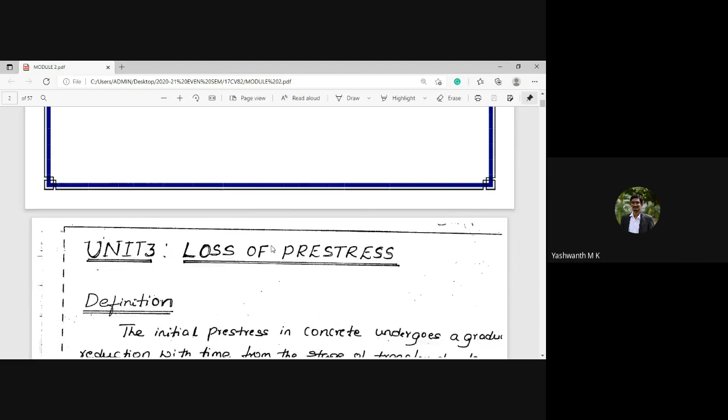First, let me define what is loss of pre-stress. The initial pre-stress in concrete undergoes a gradual reduction with time from the stage of transfer due to various causes, which is termed as loss of pre-stress. The keywords here are initial pre-stress, stage of transfer, and due to various causes it will undergo reduction.

Now I will define this in a very simple way. We know from module number 1 the concept of how to induce pre-stressing. Through the cable, we apply a compressive force on either end. We induce a pre-stressing force of certain magnitude through the cable, which may be parabolic or whatever profile. Whatever pre-stress we induce is called the stage of transfer. I hope we have solved problems on this condition.

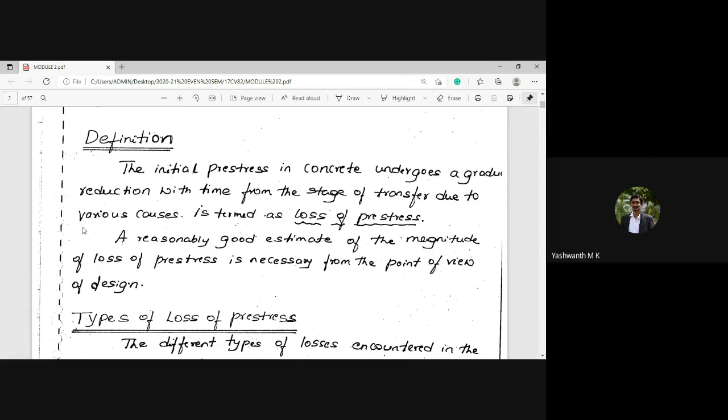So very simply, whatever pre-stress was induced in the initial stage, that is during the transfer stage, will undergo reduction as time elapses. That loss is called loss of pre-stress. Moving on, I've highlighted that whatever initial pre-stress induced during the stage of transfer will undergo reduction due to various causes. So what are those various causes? That is the next topic.

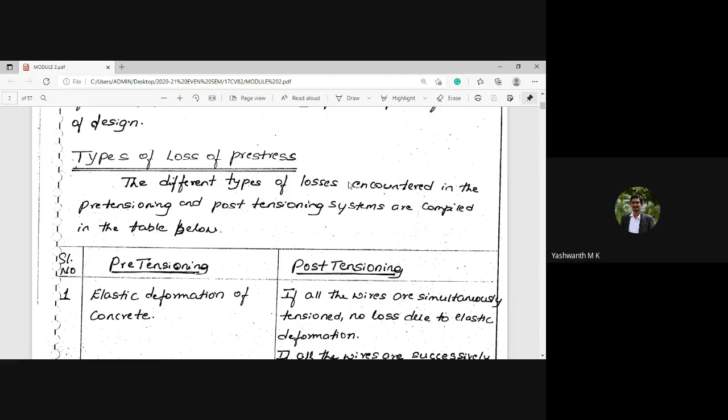The types of loss of pre-stress. Because of these causes, whatever pre-stress is induced initially or during the stage of transfer will undergo loss. Let me tell you the different types of losses encountered in pre-tensioning and post-tensioning systems, compiled in the table below. The important thing to know is that losses depend upon the system of pre-stressing.

The losses will happen in PSC beams depending upon the system. In the pre-tensioning system, you will come across certain losses, and in the post-tensioning system, you will come across certain other losses, because in both systems the types of losses will differ, due to the material and material compatibility.

As I stated, in pre-tensioning the concept of tensioning is different, and in post-tensioning the concept of tensioning is different. So based on this tensioning concept, the pre-tensioning system losses and post-tensioning system losses will differ. Let me see what those losses are.

Coming to the first loss in the pre-tensioning system, the first loss that will reduce the pre-stressing force is elastic deformation of concrete. Two materials come into picture that cause this reduction in initial pre-stress: concrete and steel. Because of these two materials, whatever initial pre-stress I induce through the cable will undergo gradual reduction as time elapses.

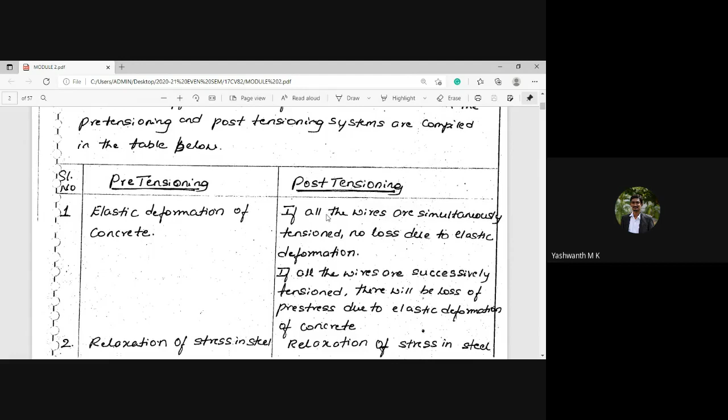Next, if the same wires - 3 number, 4 number, or any number of wires - are successively tensioned, that means tensioned one by one, then the losses that occur, this elastic deformation loss, will occur in the pre-stressed concrete beam. This is very important, you need to note down: if all the wires are tensioned together, no loss due to elastic deformation in post-tensioning. If those wires are tensioned one by one, then there will be loss of pre-stress due to elastic deformation of concrete.

Next is relaxation of stress in steel - the same thing that was there in pre-tensioning happens here also. Next, shrinkage of concrete, same thing. Creep of concrete, same thing.

Apart from these four losses as mentioned in pre-tensioning, two more losses occur in the case of post-tension beams or post-tensioning systems: friction loss, and another one is anchorage slip. Friction loss and anchorage slip - friction between the concrete and steel, and the slip of the wedges that have been put in the steel to tension.

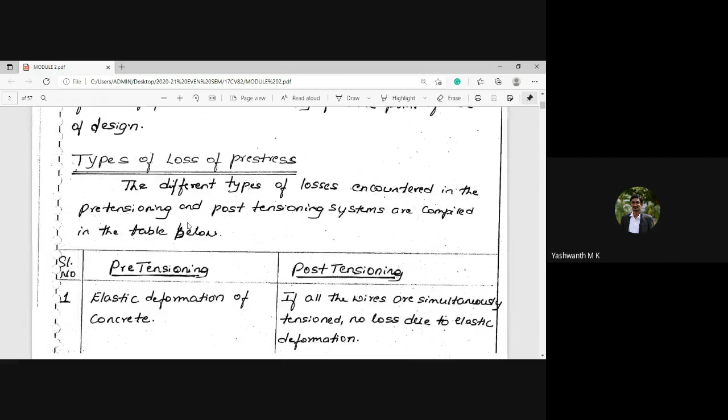From the examination point of view, this is very important. List the various types of losses. At that instance, write down in this particular way, compile these in a table and write down specifically so that full marks can be awarded to you. Now I have listed them.

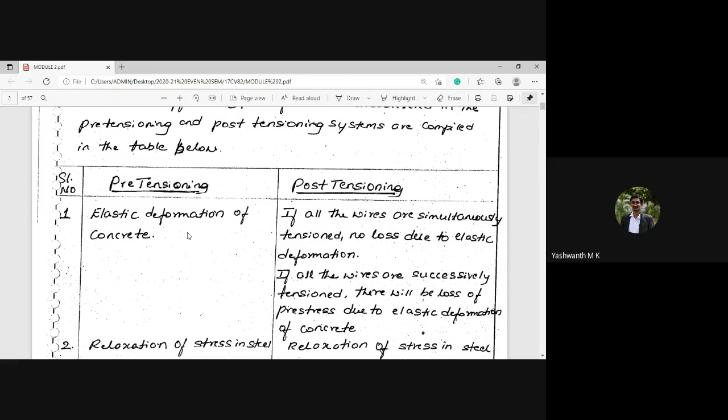So let us discuss in detail how all these losses happen in the pre-stressed concrete beam. Let me move on.

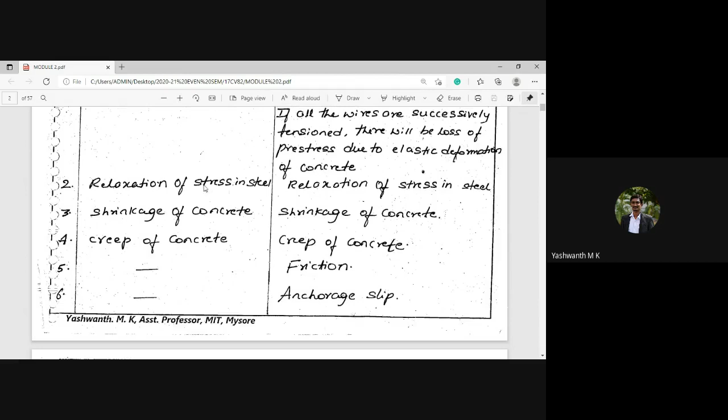The first loss, as stated, I'm going to consider the losses together. I'm not going to discuss pre-tension and post-tension separately because all four losses will be same in both, with slight difference in the elastic deformation. Regarding relaxation, shrinkage, creep, all those things are same.

So I'm going to discuss one by one. As we know from the table, the first loss is loss of pre-stress due to elastic deformation. Do you know the meaning of elastic deformation? It means once the cable that has been put inside the concrete beam is tensioned.

Later on I'm going to pour the concrete, and later on allow it to cure or get hydrated. This process you already know from the basics of the concept of pre-stressing.

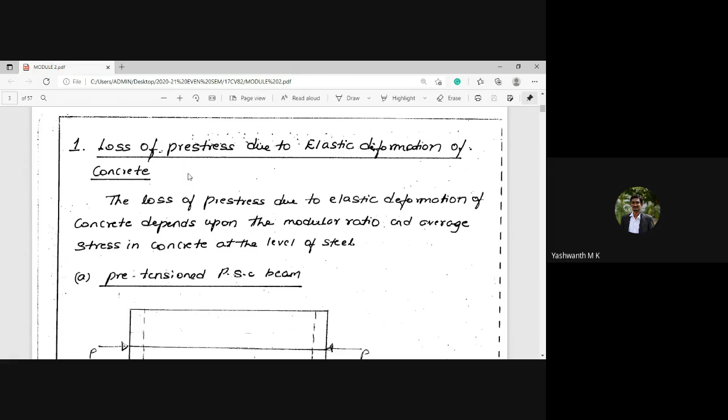After this, you can see from the diagram the concrete will undergo certain deformation as the time elapses. Whatever deformation happens will be within the elastic range.

Let me explain the reason for this deformation. Once the concrete beam has been subjected to pre-stressing force and external load - we know from module 1 the PSC beam is subjected to pre-stressing force and external load - the concrete will undergo certain deformation within the elastic range as the time elapses.

After a certain time, this concrete will undergo change - you can see here this solid line indicates the initial length. Once the concrete undergoes some elastic deformation, you can see the length has been reduced, and this deformation is within the elastic range.

Please note down, this is very important - that's why it is called elastic deformation. When concrete is subjected to external load, it is stressed, and when concrete undergoes stress, it will undergo certain deformation - that is, change in length, which you measure as strain. Whatever strain happens due to the effect of stress will be within the elastic range, that's why it is called elastic deformation of concrete.

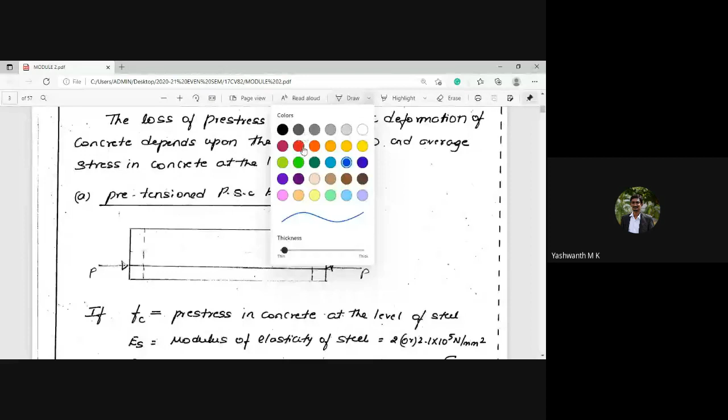The one more factor that will depend is average stress in concrete at the level of steel. So what will be the stress in concrete at the level of steel? Depending upon these two factors, one is modular ratio and another one is the stress in concrete at the level of steel, the loss of pre-stress due to elastic deformation of concrete is going to vary.

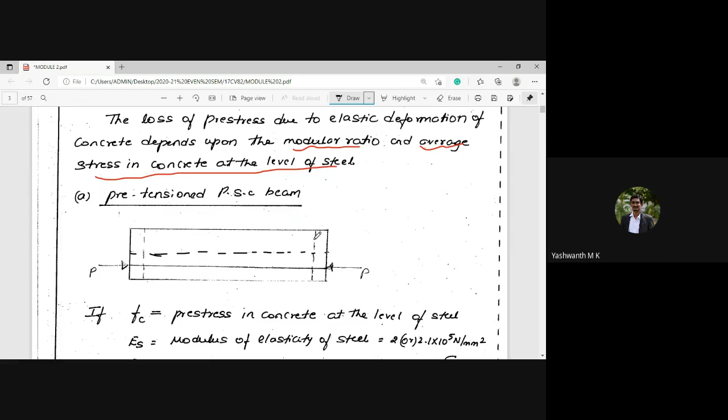Let me explain with the diagram. This will be the central axis, and this will be the PSC beam. You can see the straight cable has been induced with certain eccentricity, and has been induced the pre-stressing force of magnitude P.

Now you can see FC is the pre-stress developed inside the concrete, that is compressive stress. FC indicates compressive stress developed in the concrete at the level of steel. Why? Because I need to create a pure compression inside the PSC beam in order to counteract the tensile stresses, as already analyzed in module number 1. So here it will create a FC.

Next, ES is the modulus of elasticity of steel. We know from the basics that is 2.1 into 10 to the power of 5 Newton per millimeter square will be the modulus of elasticity of steel.

Next, EC, modulus of elasticity of concrete, which is equal to 5700 root FCK. This modulus of elasticity of concrete can be determined in two ways. This is the theoretical modulus of elasticity we can find once you know the compressive strength of a concrete or the mix, we can calculate the modulus of elasticity.

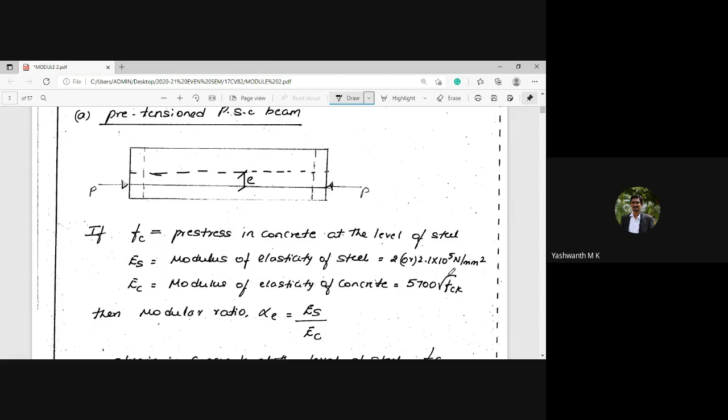The other way, the accurate or exact way we can determine is the experimental method. We need to apply the load on the concrete beam, and within the elastic range, draw the stress strain curve. Based upon the stress strain curve, draw the tangent, and based upon the secant modulus, draw the slope and calculate the stress and strain, substitute in the modulus of elasticity formula, that is EC equal to stress by strain, to calculate the modulus of elasticity of concrete.

So now, as I stated, the modular ratio is equal to ES by EC, which is very much required in the case of elastic deformation of concrete.

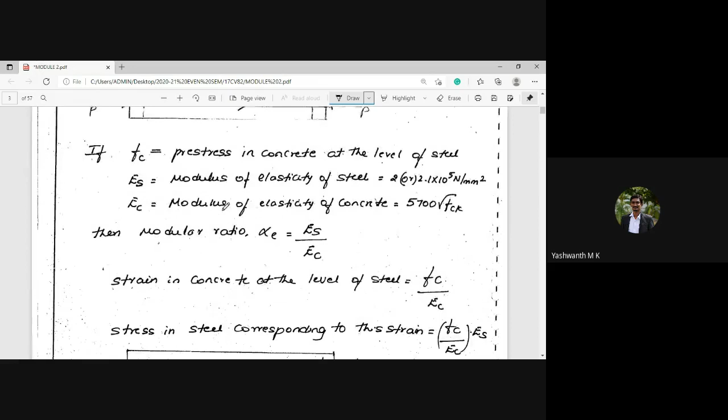Next, if you know what is the stress in concrete at the level of steel, and if you want strain in the concrete at the same level of steel, then the stress in concrete at the level of steel divided by modulus of elasticity of concrete will get you the strain in concrete at the level of the steel.

Next, the stress in steel corresponding to the strain is given by Fc by Ec into Es. So this factor multiplied by the modulus of elasticity of steel will get you stress in steel.

Therefore, loss of pre-stress equal to, what is the value of this? Es by Ec, so this Es by Ec is nothing but alpha E. Substitute that, alpha E and Fc will be retained same. So therefore, loss of pre-stress is equal to alpha E into Fc, where Fc is the stress in concrete at the level of steel, which is purely compression, given in Newton per millimeter square.

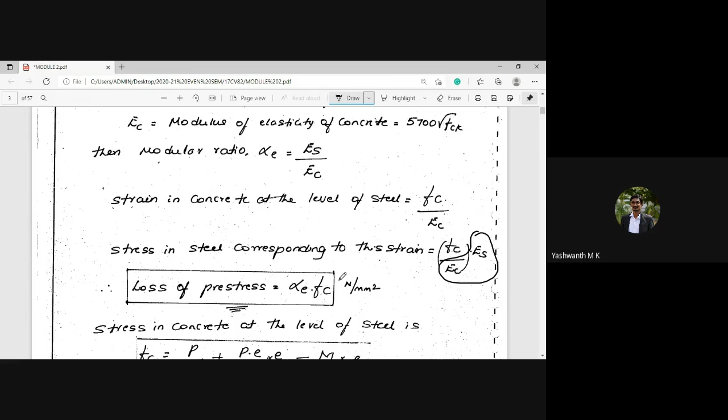Next, how to quantify or calculate this Fc? We know how to calculate alpha E, now how to calculate the Fc. This is the formula we are going to use to calculate the stress in concrete at the level of steel, that is Fc, which is given by P by A plus PE by I into eccentricity minus M by I into eccentricity. There is a small change in the formula - PE by I into E minus, that means what will be this bending stress at the level of this.

What will be the stresses due to dead load and live load at the level of steel? Based on this formula, I'm going to calculate the stress in concrete at the level of steel. Once you know Fc value and alpha E, that is Es by Ec, substitute in the main formula and calculate the loss of pre-stress due to elastic deformation in the concrete for the pre-tensioned case.

Next, let me go with post-tension, because here the two systems will differ. If a number of cables are pulled simultaneously, there will be no losses, so the loss of pre-stress becomes zero. This happens when all the cables are pulled together in the case of post-tension PSC beam. If the same number of cables are pulled one by one, then there will be loss of pre-stress.

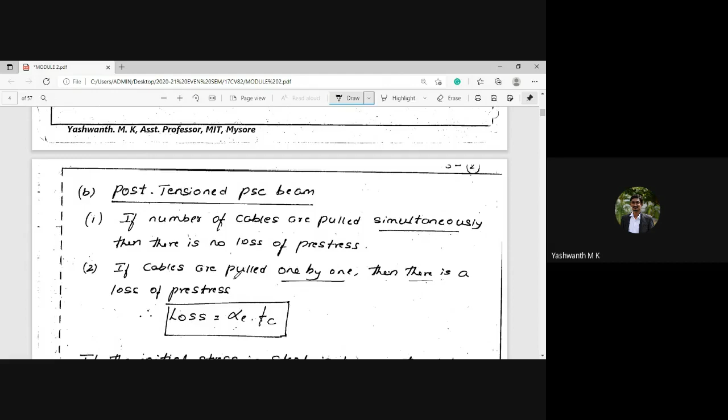That loss of pre-stress will be calculated by the same formula, that is loss of pre-stress equals alpha E multiplied by Fc. So like this, we need to calculate the loss of pre-stress due to the elastic deformation of concrete.

If the initial stress in the steel is known, the percentage loss of stress in steel due to elastic deformation can be calculated. Whatever stress has been induced inside the steel, if you know that, then you can easily calculate what percentage loss has occurred inside the PSC beam due to this elastic deformation. Because if you know the initial pre-stress and the final pre-stress, based upon initial and final we can calculate the percentage of loss of pre-stress in the PSCB. I am going to teach you this while doing the problem.

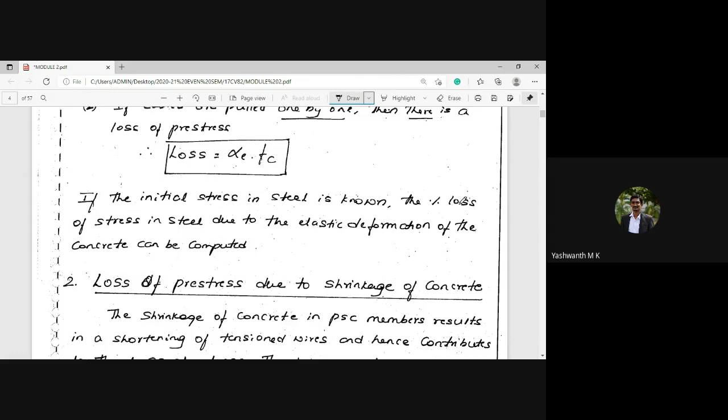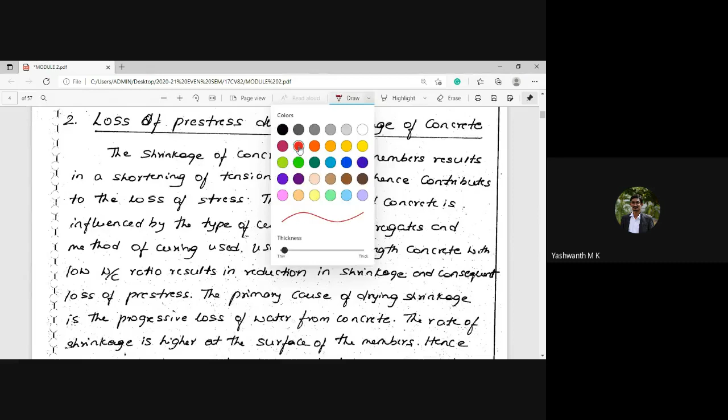Next, let me move on to the next losses that happen in the concrete, that is loss of pre-stress due to shrinkage of concrete.

You already know the meaning of shrinkage. Shrinkage is defined as the change in volume of concrete due to internal changes. As I stated, shrinkage depends upon various factors, that is cement, water cement ratio, aggregates, the type of aggregates, all those things. If these things vary, the shrinkage will vary, and if shrinkage varies, automatically the loss of pre-stress is going to happen.

The shrinkage of concrete in a PSC member results in shortening of the tension wire, and hence contributes to the loss of pre-stress. Whatever wires have been put in by tensioning inside the concrete beam will undergo deformation or change in length, or shortening in length, which will contribute to the loss of pre-stress.

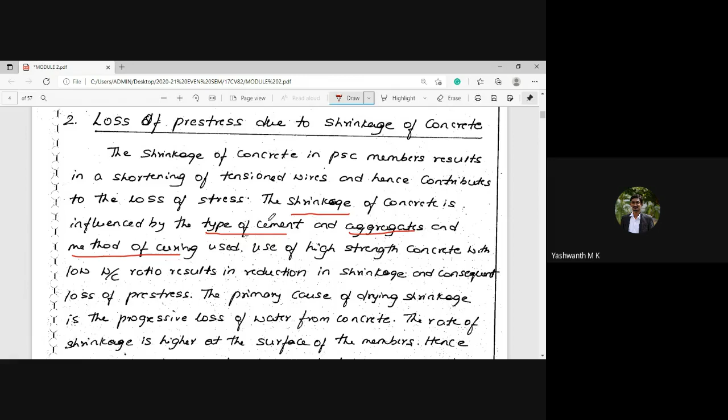The shrinkage of concrete will depend upon factors such as the type of cement, aggregates used, and method of curing. Based on these factors the shrinkage will vary. Use of high strength concrete with a low water cement ratio results in reduction in shrinkage and consequent loss.

As we know, in pre-stressed concrete members we preferably go with a special concrete called high strength concrete, which we attain with a low water cement ratio. A reduction in water cement ratio gets you high strength concrete, which in turn reduces the shrinkage, because no water or lesser water is available inside the concrete to undergo shrinkage, reducing consequent loss of pre-stress.

Next, the primary cause of drying shrinkage is the progressive loss of water. If more water is present inside the concrete, there will be enormous evaporation of water, as we know from the concrete basics. Whatever water is mixed in the concrete is going to evaporate as time elapses, and as the water evaporates from the concrete, it will undergo certain losses.

So those losses are called shrinkage. There are various types of shrinkage: drying shrinkage, plastic shrinkage, autogenous shrinkage, carbonation shrinkage, and so on. Based upon the constraints inside the concrete member, it will undergo particular types of losses.

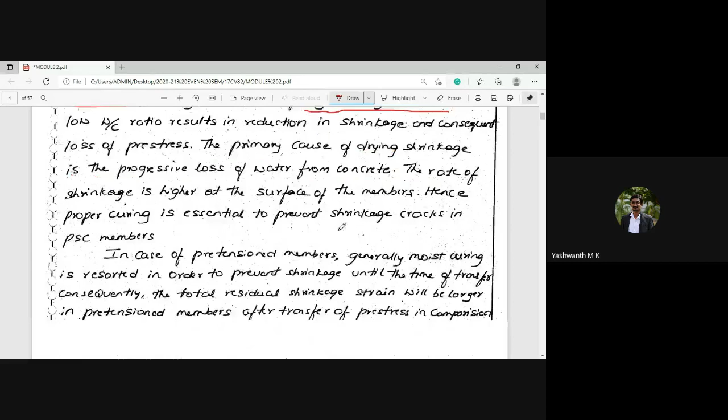The rate of shrinkage is higher at the surface of the member, hence proper curing is essential to prevent shrinkage cracks. So we need to be very cautious at that particular place, mainly at the surface. This can be avoided by proper curing, which can prevent shrinkage cracks in the PSC member.

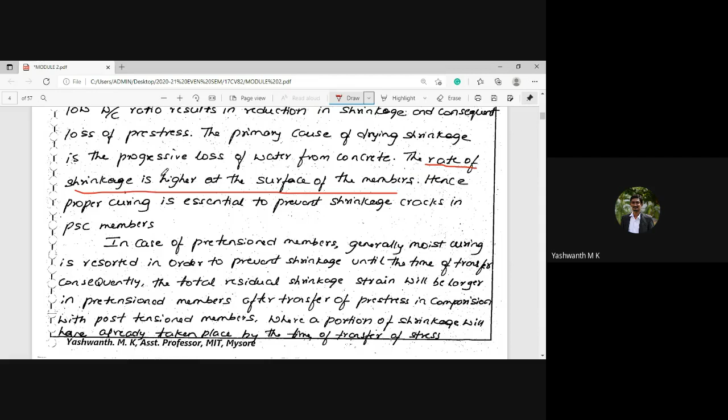In the case of pre-tensioned members, generally moist curing is resorted to in order to prevent shrinkage until the time of transfer. Please note down: in order to prevent the shrinkage, moist curing is resorted to until the time of transfer.

Consequently, the total residual shrinkage will be larger, meaning the left out shrinkage strain will be larger in the case of pre-tension members after the transfer of pre-stress, in comparison with post-tension members. So this shrinkage loss will be more in the case of pre-tension, where a portion of shrinkage will have already taken place by the time of transfer of stress.

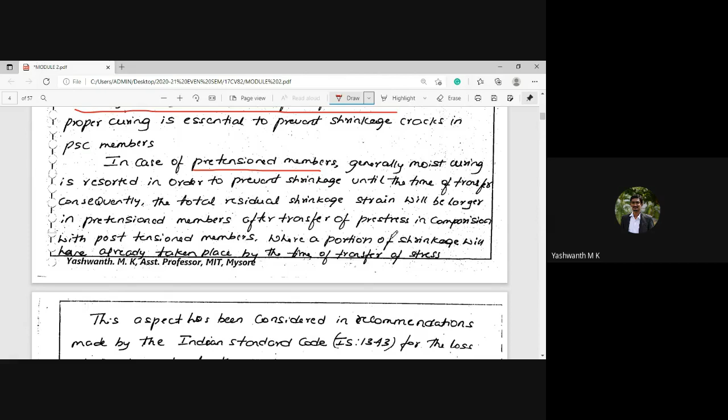That means some of the shrinkage happens during the time of transfer of pre-stress, and the remaining part of shrinkage happens after the transfer of pre-stress. That means during the transfer stage, the shrinkage will be initiated. So now I've explained the shrinkage.

Now how to quantify this? How to quantify the loss of pre-stress that happens due to shrinkage. For that, the Indian code has given certain recommendations. As per the recommendation made by the Indian Standard Code 1343:2012, or the earlier code 1980, this is the codal provision we are going to follow for analyzing and designing.

You can get some of the formulas in the 1343 codes. One is 1980, the earlier version; the present version is 2012, for the loss of pre-stress due to shrinkage of concrete.

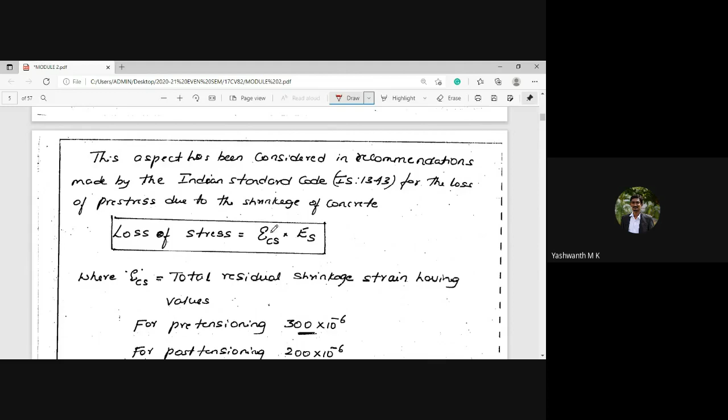The loss of stress is equal to epsilon Cs multiplied by Es. What is epsilon Cs? It is the total residual shrinkage strain having certain values: for pre-tension, equal to 300 multiplied by 10 to the power of minus 6. For post-tensioning, equal to 200 multiplied by 10 to the power of minus 6, divided by log to the base 10 of (T plus 2), where T is the age of concrete at transfer in days.

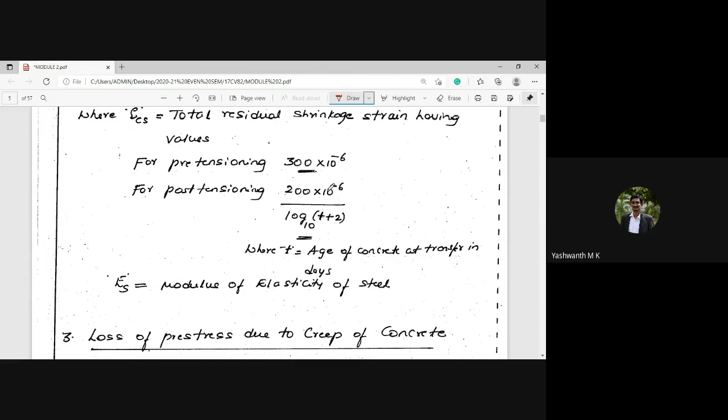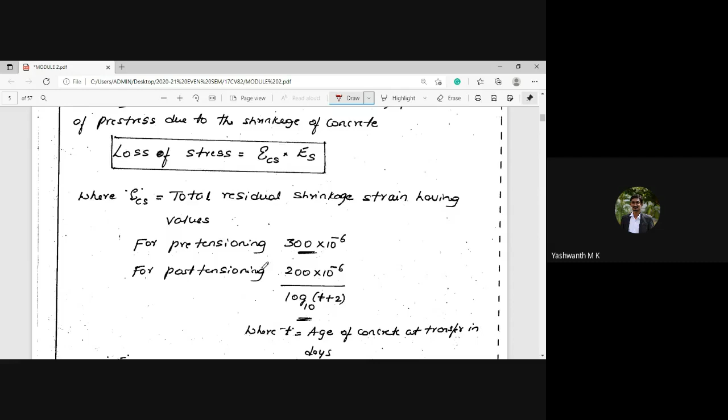So these are the two ways I can calculate the loss of pre-stress due to shrinkage of concrete. This epsilon Cs will vary based upon pre-tension and post-tension. Fine, next let me go with the next topic: loss of pre-stress due to creep.

Again, this loss happens in the concrete, so it is creep loss. Let me define what creep is: the sustained pre-stress in concrete of a pre-stressed member, meaning it is a time-dependent deformation. As time elapses, the concrete will undergo certain deformation due to external load variations or changes. That is called creep.

So the difference between shrinkage and creep is both undergo deformation. In the case of shrinkage, the deformation occurs due to internal variation. But in the case of creep, the deformation occurs due to external variations.

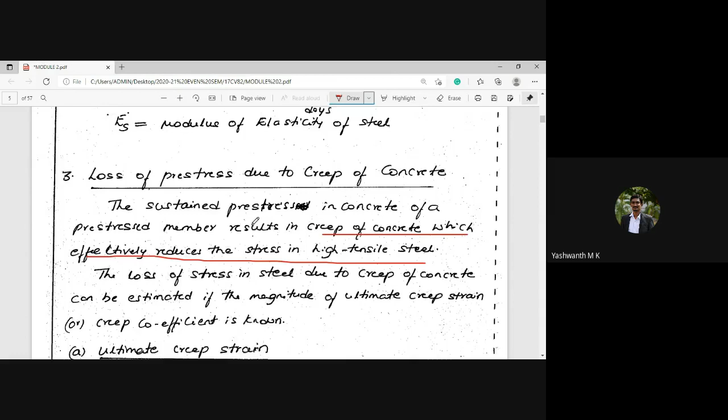The sustained pre-stress in concrete of a pre-stressed member results in creep of concrete, which effectively reduces the stress in high tensile steel. Whatever stress was initially there in the high tensile steel will undergo gradual reduction because of the creep of concrete effect. The loss of stress in steel due to creep of concrete can be estimated the same as shrinkage, if the magnitude of ultimate creep strain or creep coefficient is known.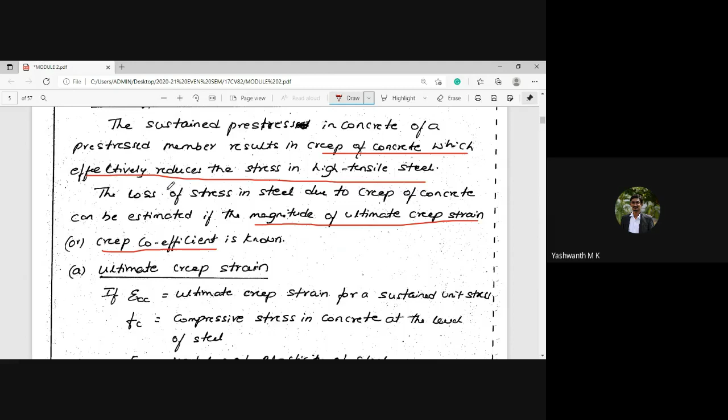So now very important, this loss of stress in steel due to creep of concrete can be estimated by two methods. One is magnitude of ultimate creep strain method, another one is creep coefficient method. Based on these two, I am going to estimate the loss of stress in steel due to creep. So first one is ultimate creep strain. Let me go with ultimate creep strain.

Let me consider epsilon Cc, which is ultimate creep strain for a sustained unit stress in a PSC beam. FC we know already, compressive stress in concrete at the level of steel in Newton per millimeter square. ES, modulus of elasticity of steel in Newton per millimeter square.

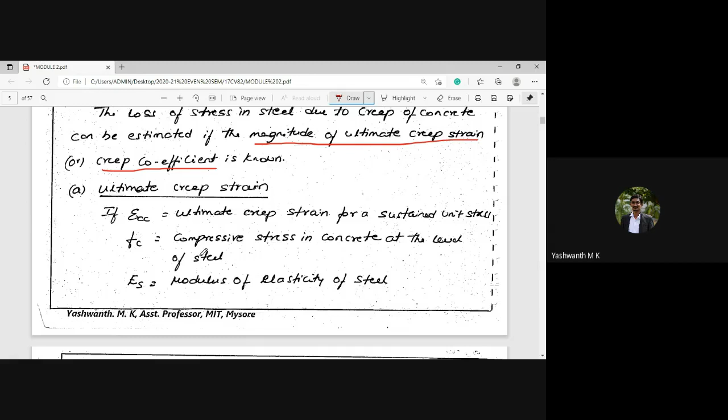So finally I will get you loss of stress in steel due to creep of concrete equal to epsilon cc, that is ultimate creep strain, multiply by stress in concrete at the level of steel fc, multiply by modulus of elasticity of steel. This product will get you the loss of stress in steel due to creep of concrete.

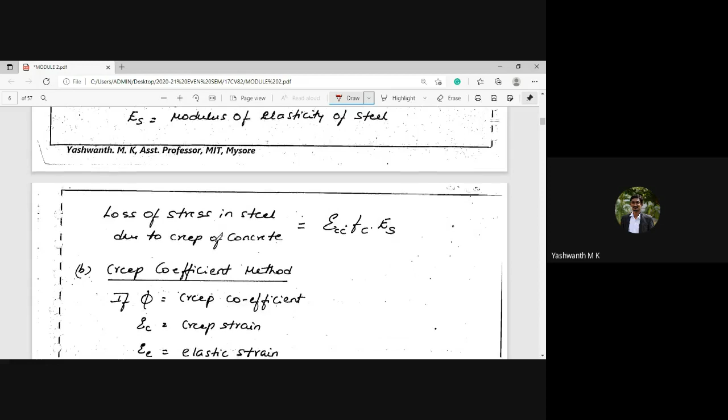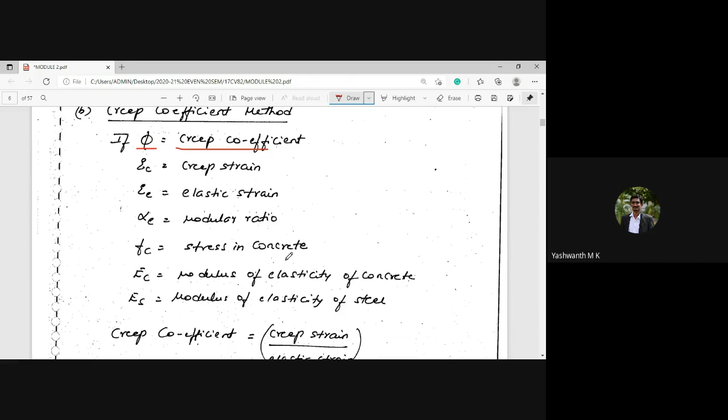Next method is creep coefficient method. This phi is called creep coefficient, epsilon c is called creep strain, and epsilon e is called elastic strain, and alpha e we already know, that is modular ratio, which is given by es by ec. fc we know, stress in concrete at the level of steel. ec and es you already know, it is modulus of elasticity of concrete and steel.

So this creep coefficient is equal to creep strain divided by elastic strain. I will repeat, creep strain divided by elastic strain will get you the phi value. So phi is equal to epsilon c by epsilon e. The creep coefficient phi is equal to creep strain epsilon c divided by elastic strain epsilon e.

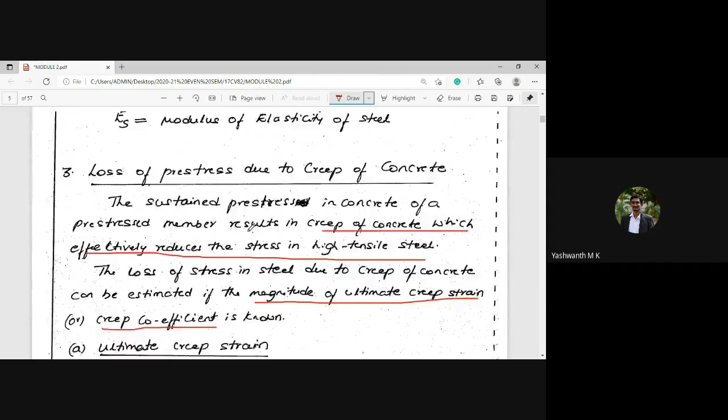So therefore, if you want to calculate the stress in steel, you can see the strain due to creep of concrete can be calculated by phi into epsilon e. That means I'm going to cross multiply this, so this epsilon e will go here. Therefore epsilon c is equal to phi into epsilon e.

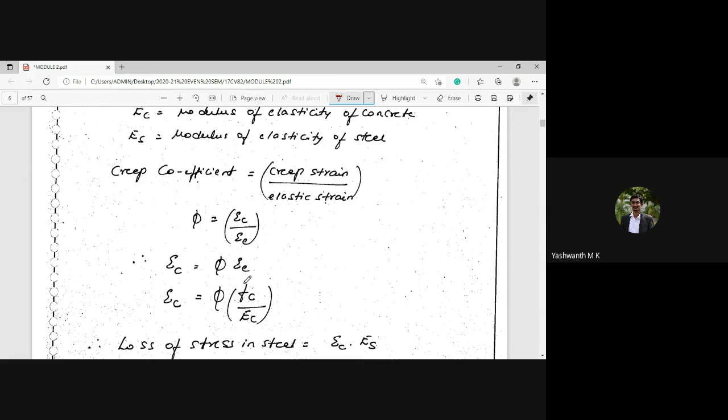So therefore epsilon c is equal to phi into, so what is epsilon e? Epsilon e, which is given by fc by ec. So that is elastic strain, which is equal to fc divided by ec. By this, we are going to calculate the strain in concrete.

Next, the loss of stress in steel is equal to epsilon c, that is strain in concrete, multiplied by the modulus of elasticity of steel. This will get you loss of stress in steel. So rearrange that. We know what is epsilon e, which is fc divided by ec.

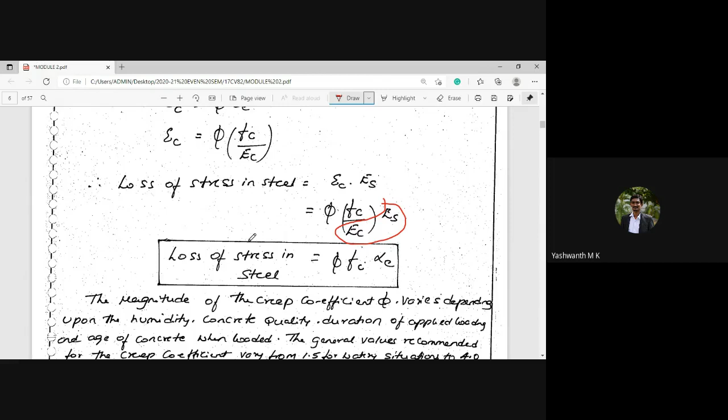Substitute that, multiply by es. Therefore, we know already what is the value of es by ec, which is alpha e, that is modular ratio. That is phi into fc into alpha e. So like this, we are going to calculate the loss of stress in steel due to creep of concrete. Is it clear?

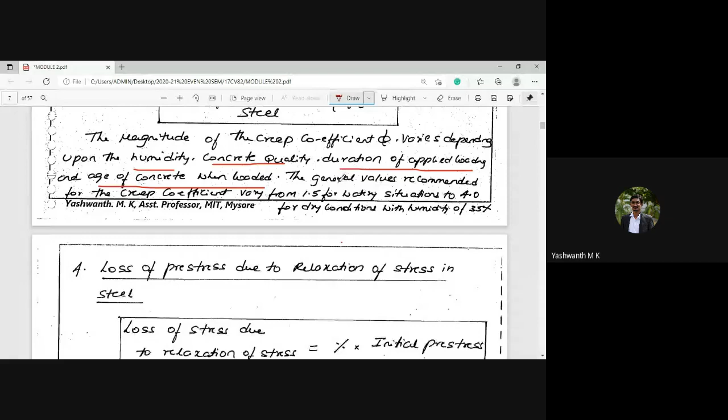So once again, the magnitude of the creep coefficient varies or depends upon humidity, concrete quality, duration of applied loading, and age of concrete when loaded. So at what particular age the concrete has been loaded, how many duration it has been loaded, what is the intensity it has been loaded, all those things will affect the creep coefficient factors.

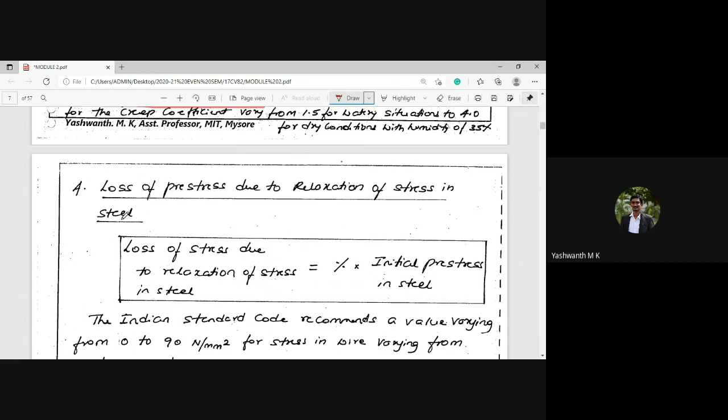Next, the next loss is loss of pre-stress due to relaxation of stress in steel. So this above three losses was there in the concrete. Now the losses that is going to encounter in the steel. So therefore loss of stress due to relaxation of stress in steel. That means the steel will undergo certain relaxation. So once it has been loaded, it will come back to its original position. So that is called relaxation.

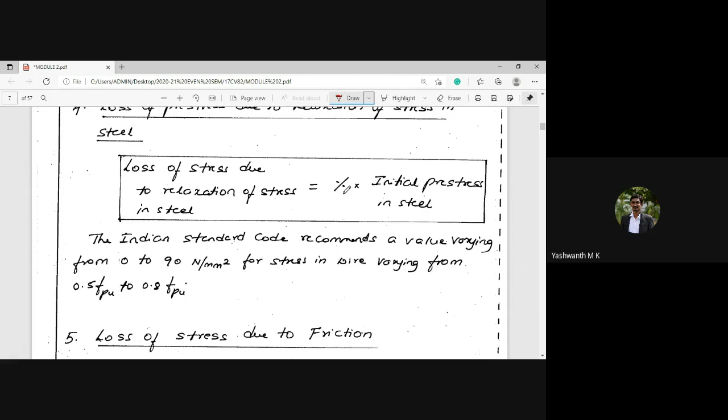So which will be given by percentage of relaxation that is going to happen multiply by initial pre-stress in the steel, which will get you the loss of stress due to relaxation in Newton per millimeter square. The Indian Standard Code recommends a value varying from 0 to 90 Newton per millimeter square for stress in wire, varying from 0.5 FPU to 0.8 FPU FPU means ultimate stress in pre-stressing steel. Is it clear? So this is the formula you are going to use to calculate the stresses due to relaxation of stress in steel.

Next, loss of pre-stress due to friction. So now observe here, till now we have discussed the losses for pre-tensioning system. Now, as I stated, two more losses are going to add: frictional loss and anchorage slip.

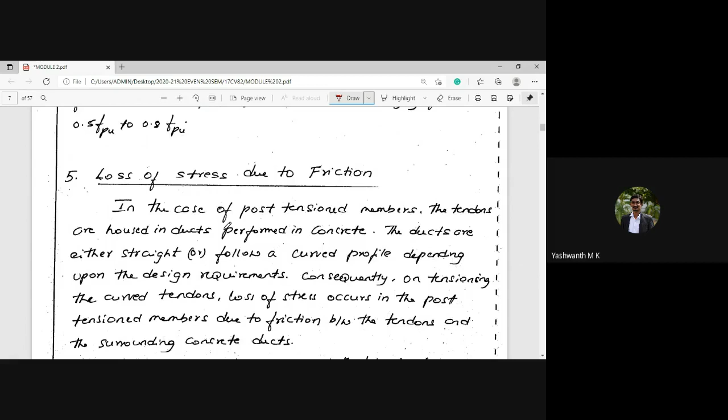In the case of post-tension members, the tendons are housed in ducts. These ducts are either straight or follow a curved profile depending upon the design requirement. For example, if you want a parabolic cable profile, you cannot go with a straight duct, you need a curved duct. So based upon the profile of the cable, you need to change the shape of the duct.

Consequently, on tensioning the curved tendons, loss of stress occurs in the post-tension member due to friction between the tendons and the surrounding concrete, to which the tendon gets bonded. Between these two materials, the friction will undergo some losses. So this is loss of pre-stress due to friction.

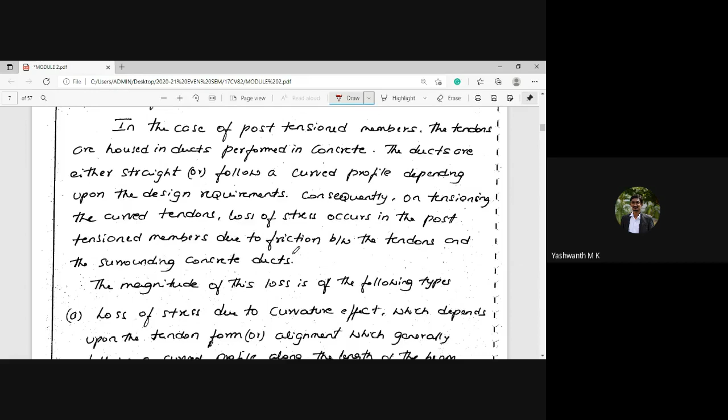The magnitude of this loss is of the following type. First, the loss of stress due to curvature effect, which depends upon the tendon form or alignment, which generally follows a curved profile along the length of the beam. This curvature effect mainly comes across in the case of curved profile cables.

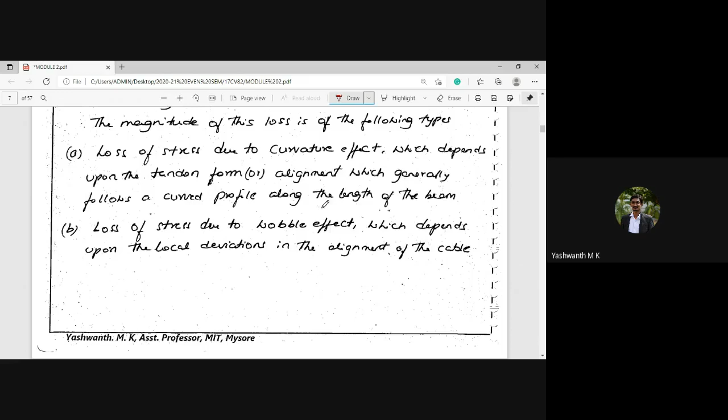Next, loss of stress due to wobble effect, which occurs because of wobbling of the cable. This depends upon the local deviation, that is, deviation of the cable placed from the alignment. If the cable deviates from the alignment, this deviation occurs because of the wobbling or wobble effect in the cable. So these are the two losses or effects that will come across, which in turn cause loss of stress in PSC members.

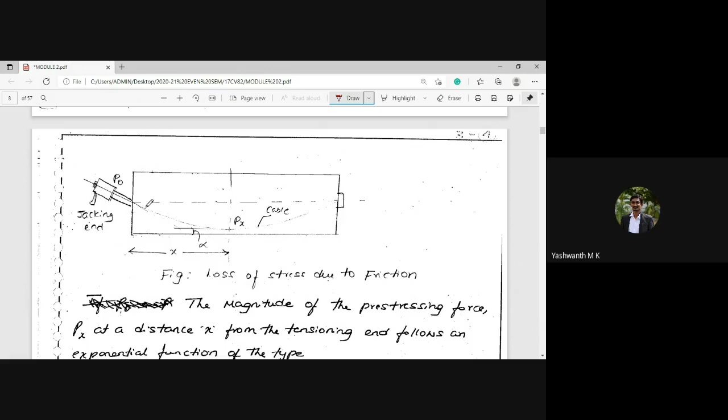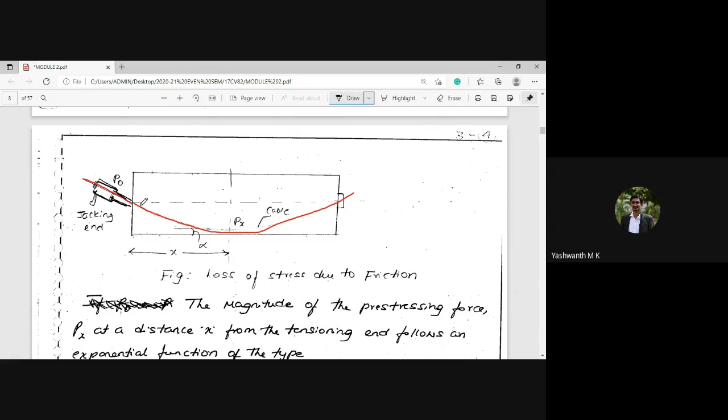Let me go through this. You can see here, this will be the central axis, and this will be the parabolic cable. Through this, I'm going to induce the jacking, so this will be the jacking end, where the cables will be jacked. Now this is the distance where the initial pre-stress magnitude will be induced. You can see here the magnitude of the pre-stressing force Px at a distance x from the tensioning end follows an exponential function of this type.

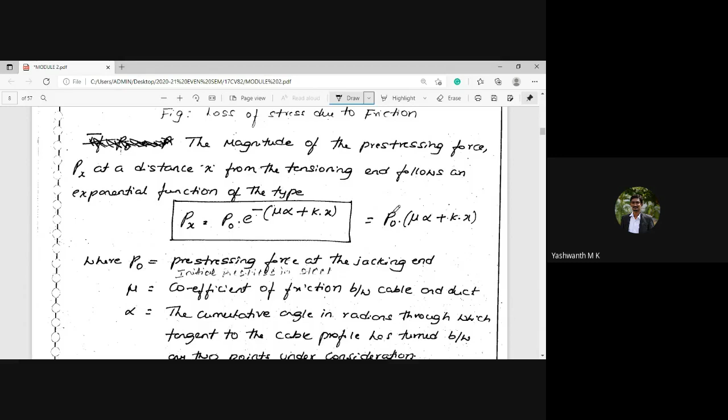That is, Px equals P naught multiplied by e to the power of minus (mu alpha plus kx). This is the formula we use to calculate the loss of pre-stress due to friction. Simplifying this, the loss of pre-stress in steel due to friction equals P naught into (mu alpha plus kx), considering the term small enough to simplify. Here P naught is the pre-stressing force at the jacking end, and P naught is the initial pre-stress in the steel. Alpha is the cumulative angle in radians through which the tangent to the cable profile has turned between any two points under consideration. You can see here, this will be the angle alpha.

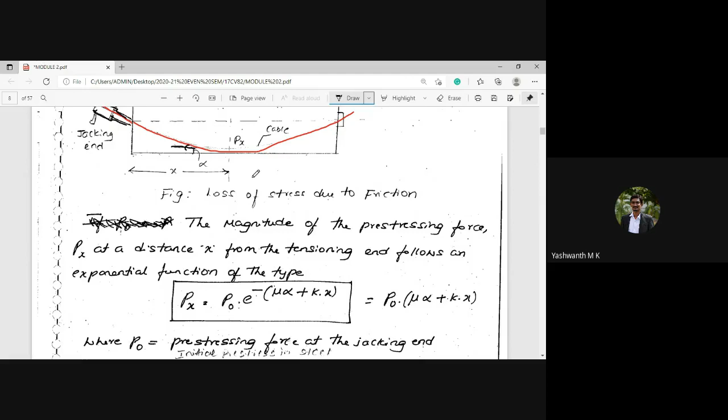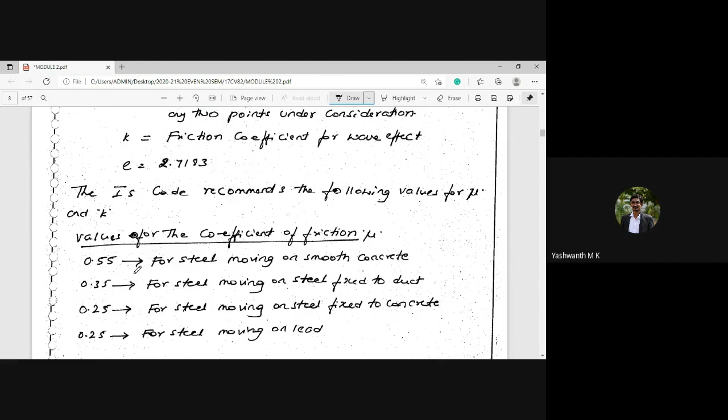Next, K, the frictional coefficient for wave effect. Alpha, you know what mu is, that is the coefficient of friction between cable and duct, and X is the distance where the pre-stressing force is applied. IS code recommends values for mu, coefficient of friction between cable and duct, depending upon the surface, whether it is smooth concrete, steel fixed to duct, or steel fixed to concrete. Based upon that, we can increase the coefficient of friction.

Once again, the coefficient for wave effect, that is K, is 0.15 per 100 meter for normal condition, and 1.5 per 100 meter for thin wall ducts and where vibrations are encountered. That means the wave effect will be more in the case of thin walls and vibrations. For normal conditions, the wave effect will be only 0.15.

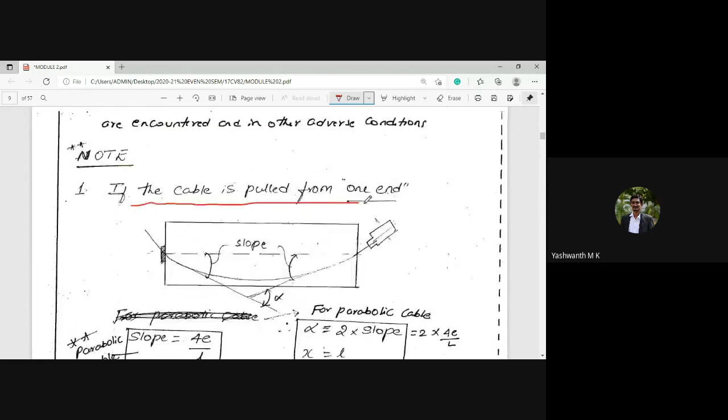This is a very important point that will come across while analyzing the problem or calculating the loss of pre-stress. Please note: if the cable is pulled from one end, that is jacking, then especially for a parabolic cable, the slope is given by 4e by L, where e is the eccentricity and L is the length of the beam.

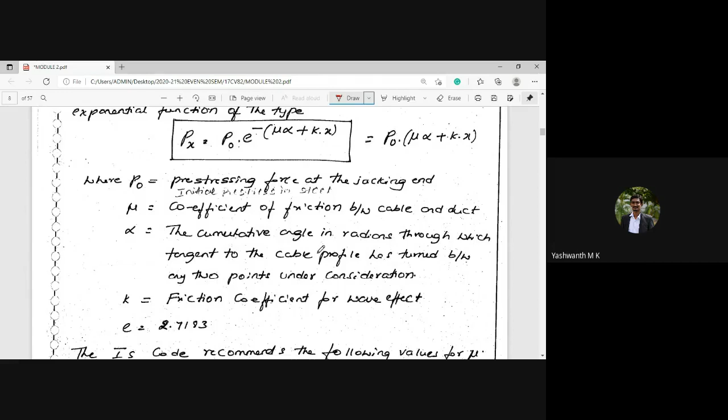For this case, if pulled from one end, for a parabolic cable, alpha, that is the slope, is equal to... we know what alpha is: the cumulative angle in radians through which the tangent to the cable profile has turned. I've drawn the tangent to this cable profile, and from where it meets the point of intersection from that end is called alpha.

This alpha is equal to twice the slope, that is 2 into 4e by L, for a parabolic cable, and x is equal to L for a parabolic cable. When you come across a linear cable instead of parabolic, with the same one-end jacking, the same formula applies, no change, 2 into slope, x is L, but there is a small change in the slope formula: for parabolic cable it is 4e by L, for linear cable it is 2e by L. This is a small change you need to observe, varying based upon the shape of the cable.

Next, the second condition: for the same pre-stressing force and same cable, if pulled from both ends instead of one end. In the earlier case I used a parabolic cable example, here I'll use a linear cable example. In both cases, once pulled from both ends, the slope formula is 2e by L. For one end, it is 4e by L, and for... okay, strike that off, that's not correct.

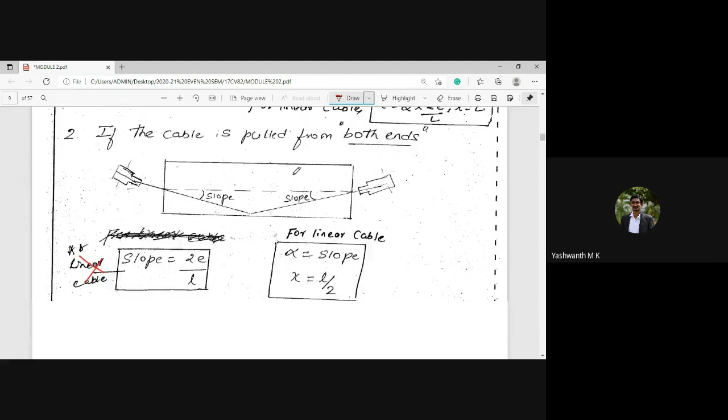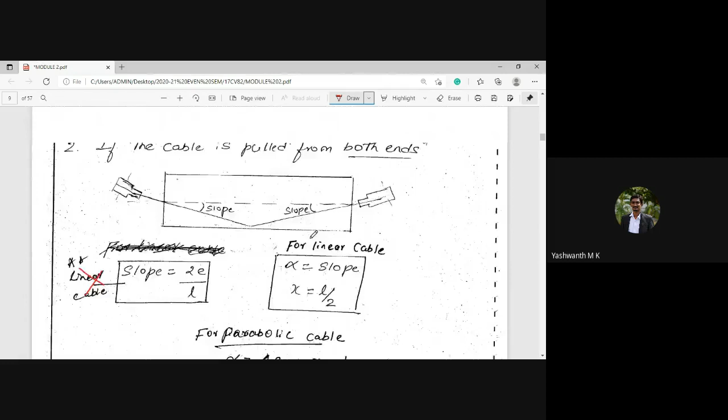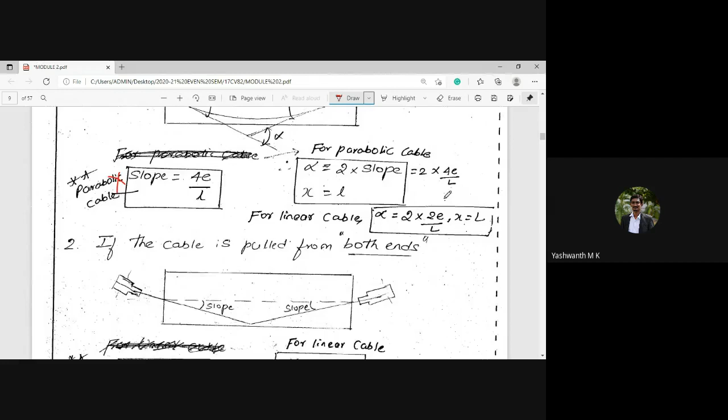For linear cable, alpha is equal to the slope, which is 2e by L, and x is equal to L by 2. For parabolic cable, alpha is equal to 4e by L... okay, for linear cable it is 2e by L, and for parabolic cable it is 4e by L, with x distance L by 2. In the previous case it was twice the slope, in this case it is just the slope. So this is the difference between a cable pulled from one end and both ends. And another difference is based upon the shape: if parabolic, it is twice, that is 4e by L; if linear cable, it is 2e by L. These are the two things that will differ.

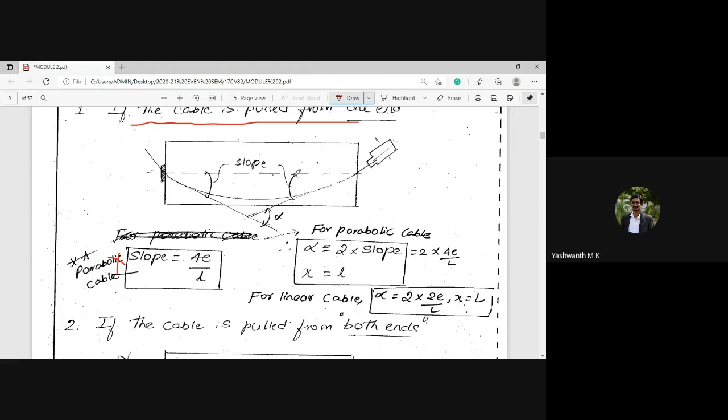You will come across this condition while calculating the loss of pre-stress in pre-stressed concrete beams. Hope you have understood.

Let me move further. The next loss is the loss of stress in steel due to anchorage slip. What is anchorage slip? This friction loss and anchorage slip loss, as I stated, will come across only in the post-tensioning system.

So now in most post-tensioning systems, when the cable is tensioned and the jack is released, please observe: to transfer the pre-stress to the concrete, the friction wedges—whatever wedges were showcased in module number 1, why were the wedges put? In order to induce the tensioning through the cable.

So those wedges will get loosened. Automatically, whatever wedges have been put will loosen, so those grips will be loosed, and the wedges will undergo certain slip. That slip will occur over a small distance, and this is called anchorage slip—whatever wedges have been anchored will undergo this loosening, called slip.

This slip will be very minute and small in magnitude, maybe in millimeters. The magnitude of slip depends upon two factors: the type of wedges, and the stress I am going to induce. Based on these two factors, the magnitude of slip will vary.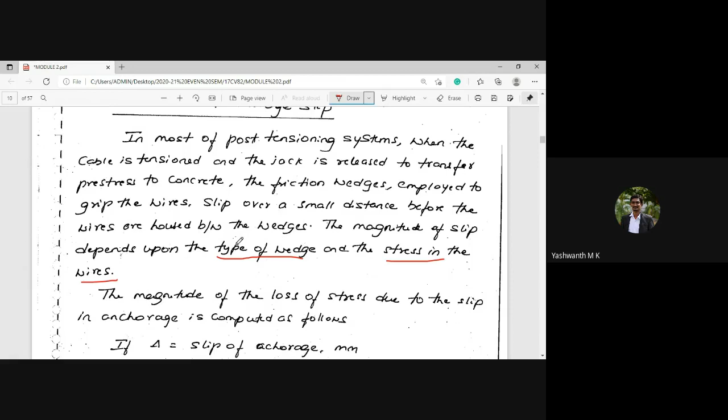So next, the magnitude of loss of stress due to slip in anchorage can be computed by a formula: Delta is equal to PL. With a slight modification, the loss of pre-stress due to anchorage slip can be calculated. This formula we are going to use to calculate the loss of pre-stress due to anchorage slip in the concrete.

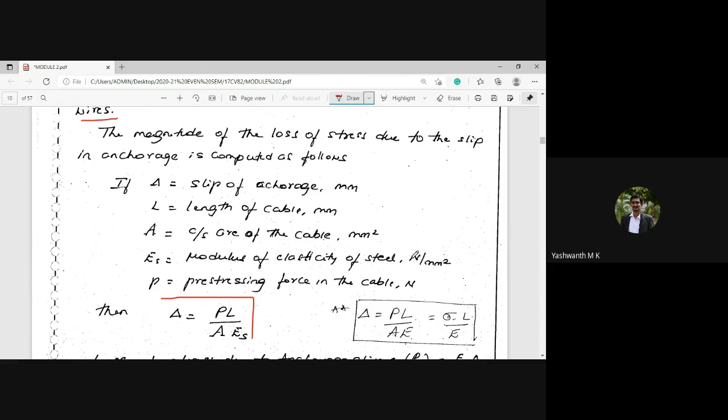So you got this formula, where delta is the slip of anchorage in millimeter, L is the length of cable in millimeter, A is the cross-sectional area of cable in millimeter square, ES is the modulus of elasticity of steel in Newton per millimeter square, and P is the pre-stress force in the cable in Newton.

As we know, the basic formula is anchorage slip equals PL by AE, where E is the modulus of elasticity of steel. Therefore, the loss of stress due to anchorage slip—we know that is P by A—substitute that, giving ES multiplied by delta, divided by L, which gives this loss of pre-stress.

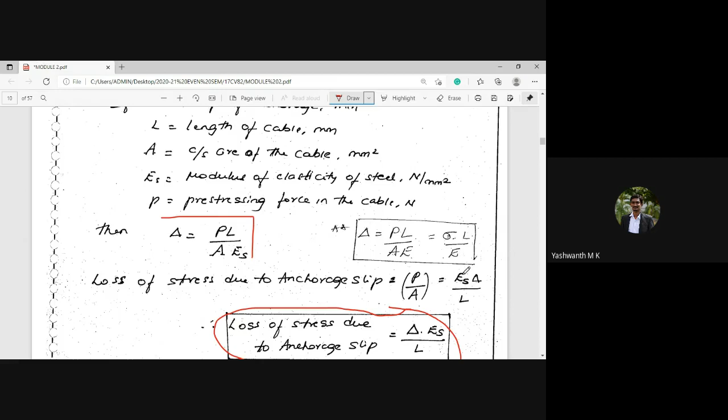So I have taken out this P by A, which is load by area, and load by area is called stress. Therefore, stress is equal to ES delta by L. So finally, the loss of stress due to anchorage slip is equal to delta ES by L. This is the formula you are going to use to calculate the loss of stress due to anchorage slip in the pre-stress.

These are all the losses you will come across while analyzing PSC. In module number 1, you learned how to transfer the pre-stressing force in the cable. In this module number 2, what you've learned is that the initial pre-stress from module 1 will undergo certain losses, which vary depending on the type of tensioning system—pre-tensioning and post-tensioning—as discussed in this session.

From the examination point of view, module number 2 is very important. In the examination, they may ask you to list the various losses of pre-stress encountered in PSC, or explain each loss, or explain each loss in the pre-tension and post-tension pre-stressed concrete beam. So these formulas you need to learn.